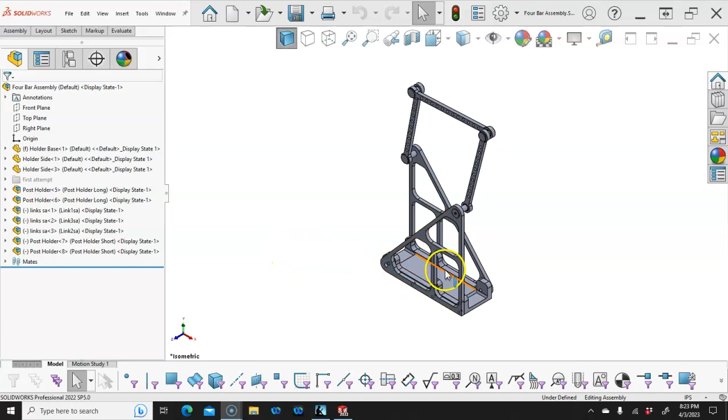Our next step is going to be prepping for the drawing. We need to put in the rest of the fasteners. We have the 832 from the sub-assembly. They called out an inch and 1.25 inches, but I don't think there's much of a difference. And when I did the call out, I made that a 1/2 inch, so as long as we got enough clearance. And they also made these hex bolts, hence the HF bolt.

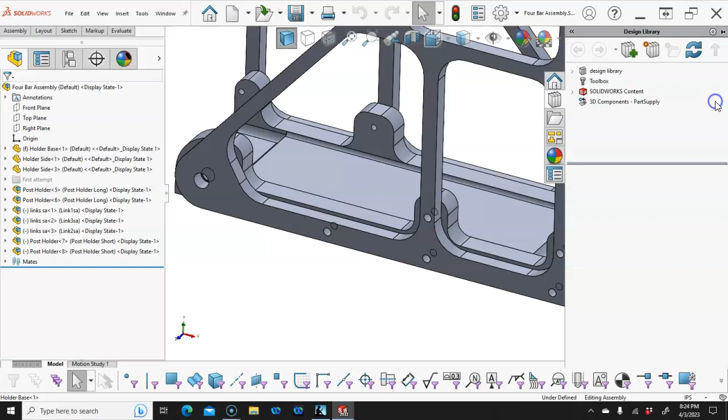So we'll make sure that the toolbox is loaded, and open up the hex head. It probably will end up being a machine screw, so I don't remember where the cutoff is exactly, but let's go with machine screws. Have that style.

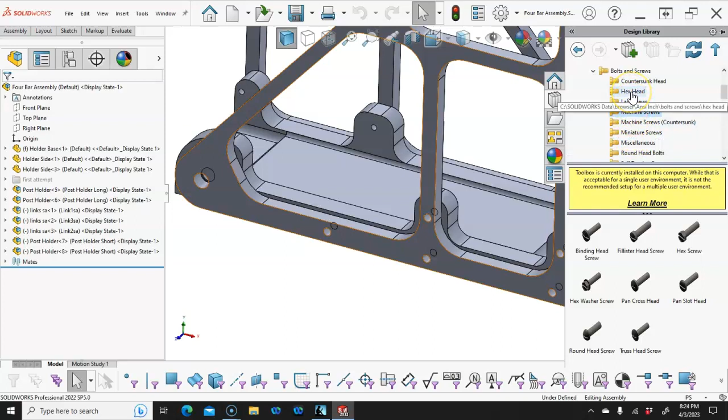Alright, well, we'll stay. It's not going to be a heavy, so let's just grab a hex finished and see if it goes to 1/4-20. Alright, so 1/4-28. I want to pick for the 1/4-20.

It'd be nice if it gave us the lengths there. I'm fine with the 1 inch. I don't know that the 1 1/4. This again is going to be if there is a little bit of a shoulder. So the way this lines up is we have 3/4 inch of thread, 1/4 inch of shoulder for an overall length of 1 inch. Or we change it to be 1 inch of threads, basically fully threaded.

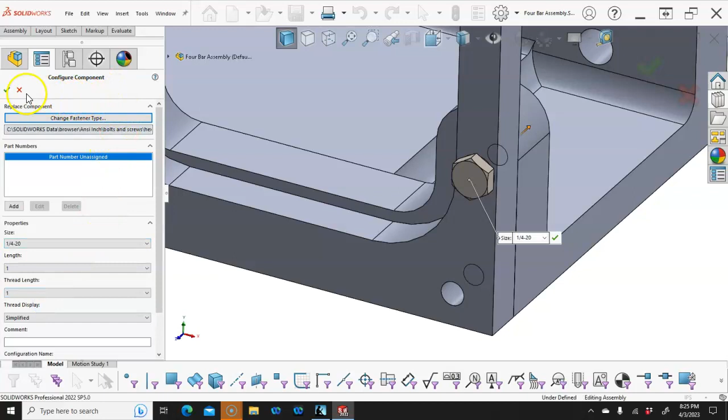Alright, so we're going to go through and place. And I did not turn the anti or the lock rotation back on, so I'm going to check those real quick. They're under defined, and that one's not there, so let's go identify that again. Hole Wizard, Toolbox, Lock Rotation of New Components. Determined that that was not good for the bearings, but still kind of like it for the fasteners.

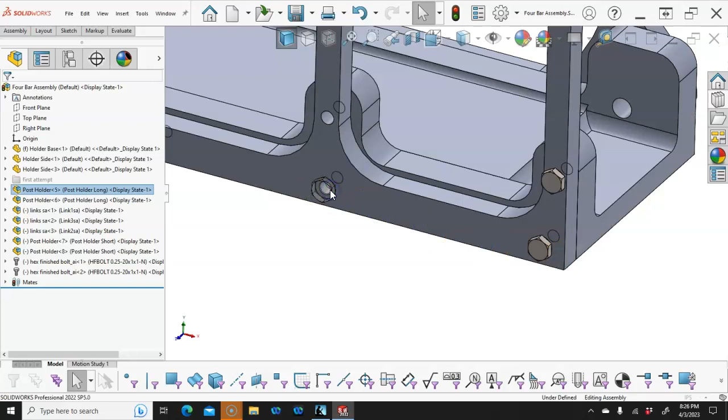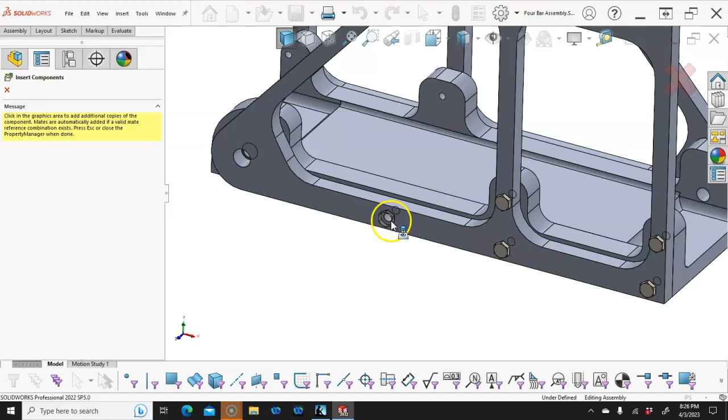Alright, so we'll place that one. And it reverts, so go back 1/4-20 and to 1 inch, 1 inch of thread, and accept. Alright, and one more there, and then we can flip this around. Alright, and if I miss, then I'm just going to apply those mates manually.

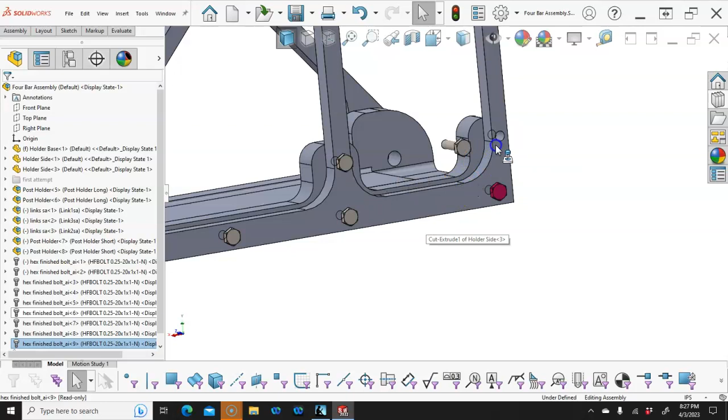And let's go ahead and leave one. I want to do the hex finish bolt, and we'll do the drag and drop. So it still picks up the mate reference and drops it in place. It also picked up the concentric and locked the rotation. So it's kind of unnatural that all of these are facing up, but okay, we'll go with it.

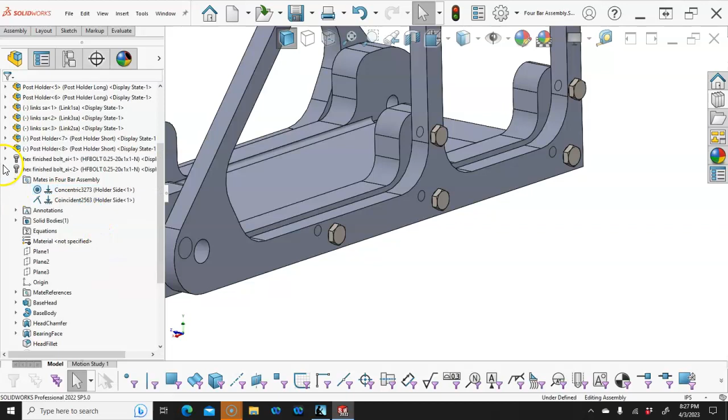So the first two that I put in, I need to lock rotation. And really that's just preference that there's no minus signs in front of anything. Alright, the next one, we'll go with the hex finish.

Place it. This is going to be a 1/2-13. It goes to the 1/4-20. Length could be 1 inch as well, 1 inch of thread. So we place that one.

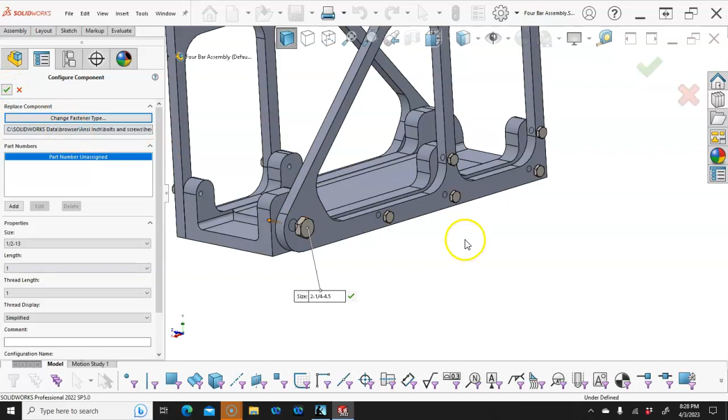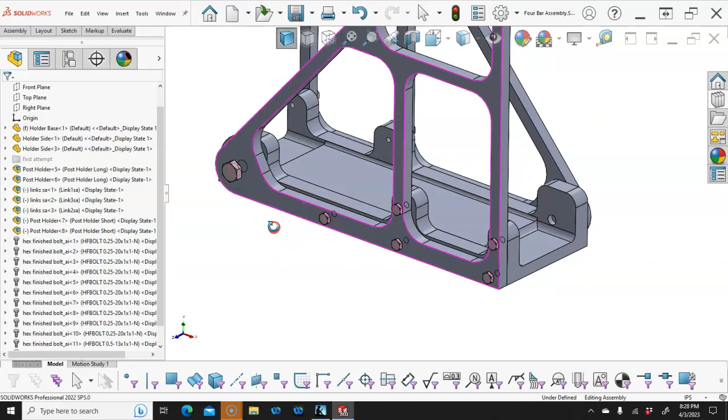Now what we didn't do was washers. Washers were not called out here, but if this is aluminum, anything that is going to gall into or potentially wallow out the surface, we'd want to probably put that in.

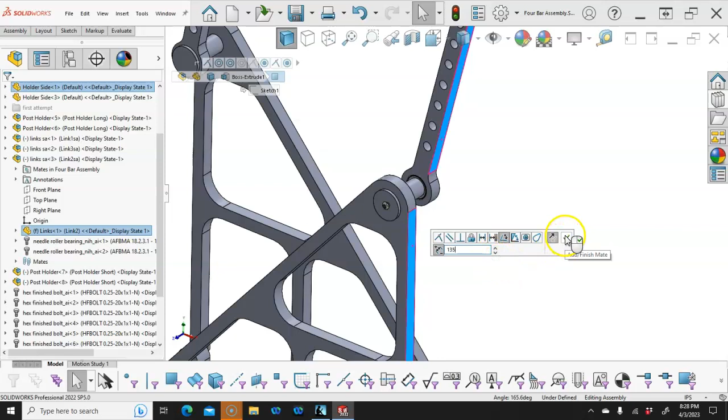Alright, so for the standard, we're at the default configuration. I would like this in a position where it's not going to move unexpectedly. If we want to do the dynamic, we can work on that. 165. Let's go with 135. So basically just picking something and placing it.

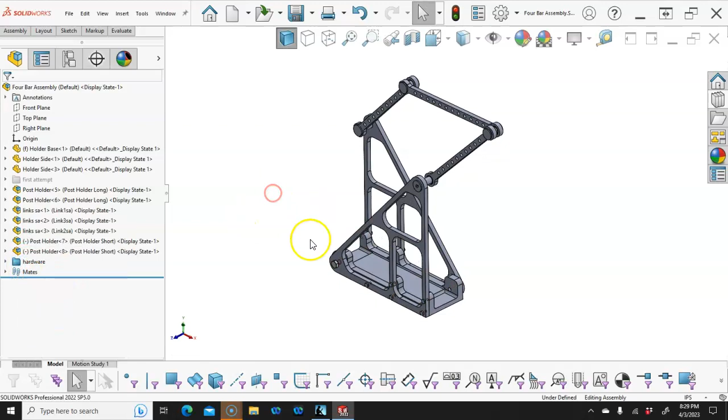Alright, and then what takes up space on the fasteners, I'm going to right click and add to new folder, and either hardware or fasteners, something along those lines that will scoop all those up. So on the display state style, that's one that we can hide all of them together, show all of them together, suppress them, be able to manage both the display and the suppression states.

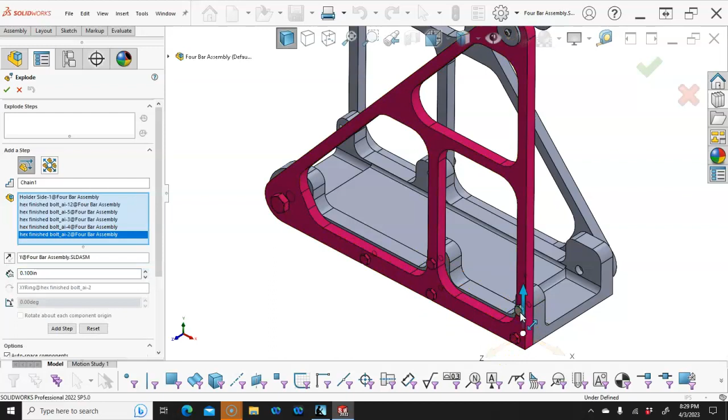Alright, going into our exploded view then, I think we'll go with the side and the screws with the auto spacing. Now it put me in Y since I selected it, see if I can clear that selection. Go back in, pick it. It's not really letting me deselect it.

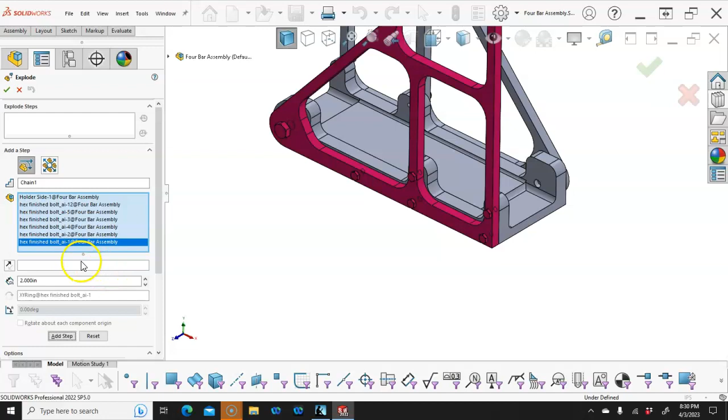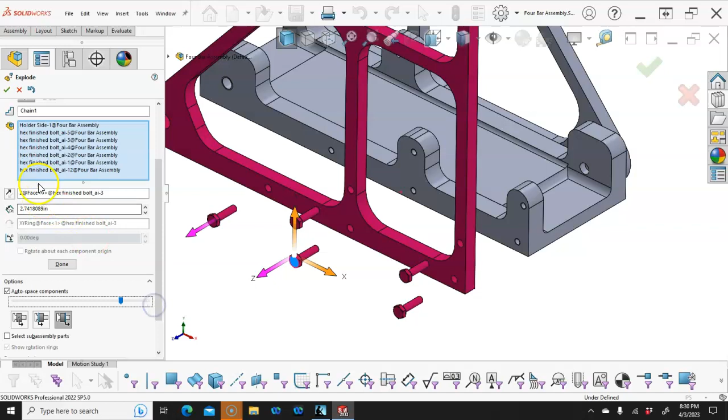So let's put in a number and hit tab. Nothing. Okay, so actually Z works, so we'll bring that out. And not overly sure, so let's reverse. There we go, that looks a little bit better, and increase the spacing a touch. Oh, I didn't really need to get out of that to take a look at it, just accept it.

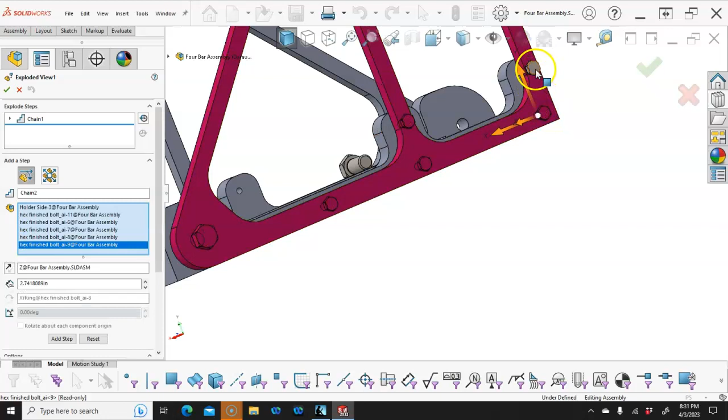Alright, so the hex got a little crazy there. Let's go ahead and edit the feature, get back in there. We'll do the same thing. Try to stay away from those arrows until you're ready to pick.

Then we'll go Z and do 3 inches on that side. Flip. Direction looks pretty good. And make sure to click on the done.

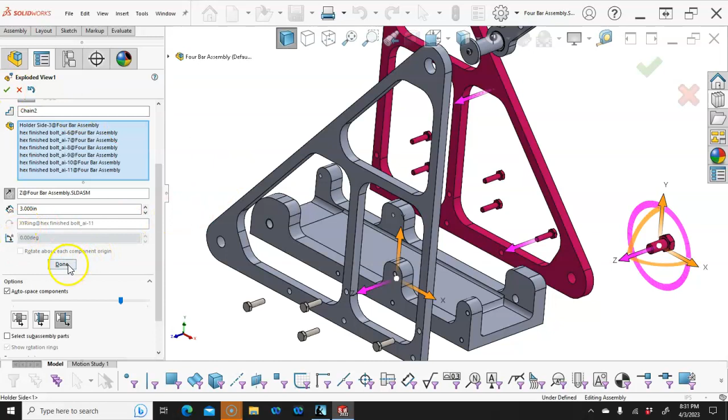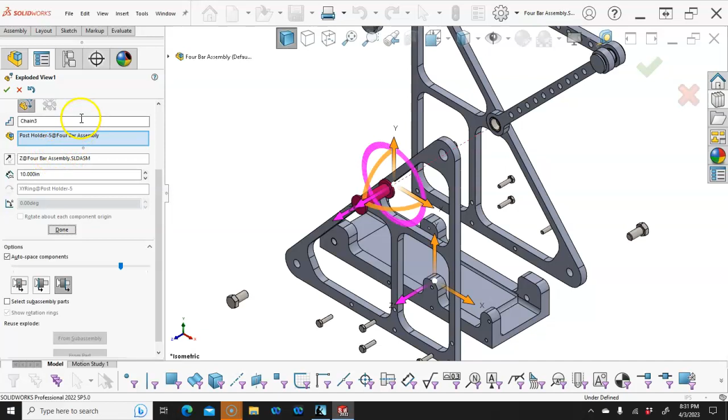We don't have a subassembly explode, so we're just going to bring that one out some distance. Let's see if I go isometric. And maybe up to 10 inches, just get a little separation in there. And done.

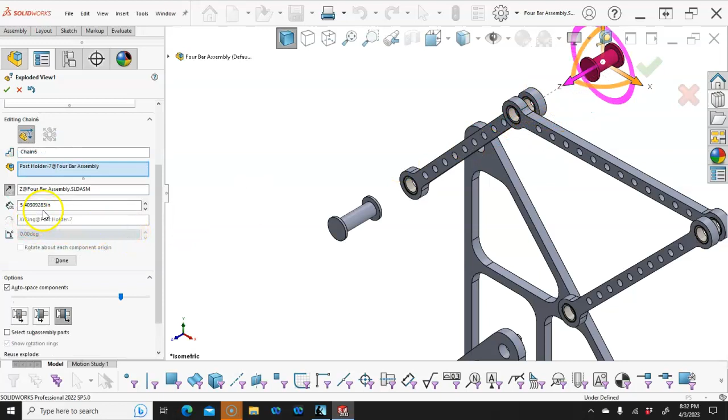And 5 inches, done. Bring that one out that way. And 5 inches worked, so done. And then we can go a couple that way, and done. Alright, so we'll see what that looks like.

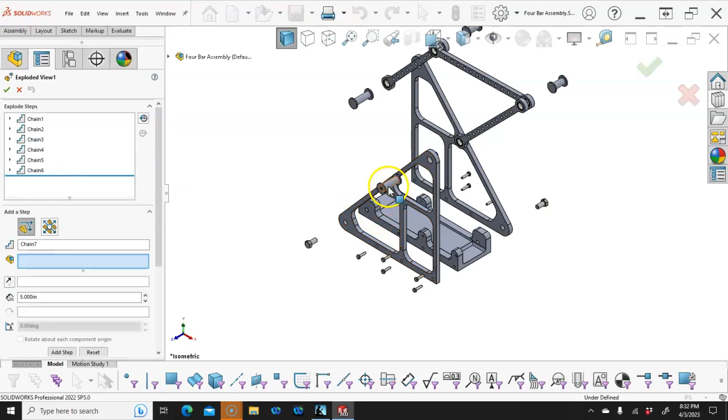Pretty much the only one that I can't say I'm real happy about is - I don't think I can pull that one out far enough, so on its chain, maybe better just to raise it up a bit and add another segment there. So that went 4 inches, so let's round it off, get it out of view there a little bit. Alright, so not great, not terrible.

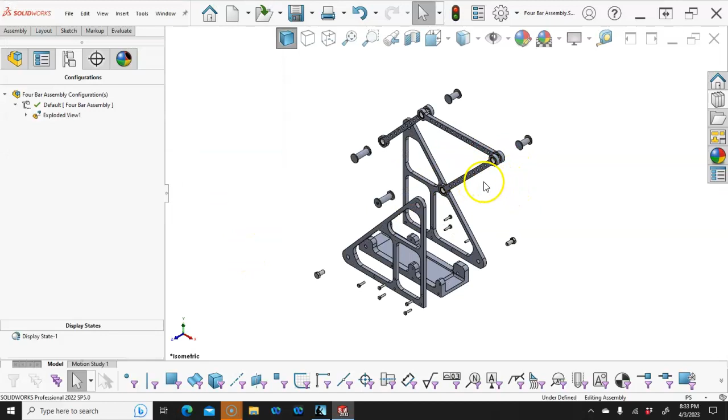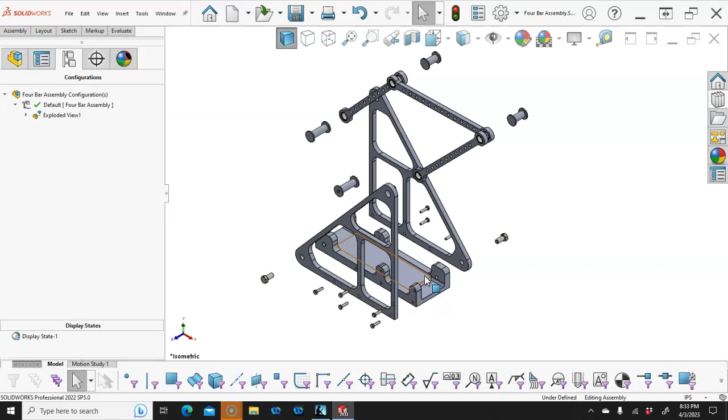We'll go ahead and save it. And really I'm hesitating for moving it after the problems that I had with the video. Alright, so this puts us in a good position to start the drawing, have our assembly with an exploded view. Could make a few adjustments if we need to, but I'm not seeing anything too crazy, so I'm ready to create the drawing.